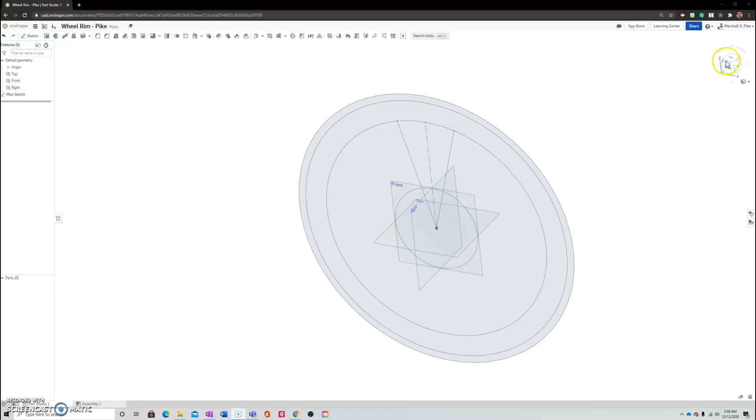For the first one, we're going to Shift E to extrude. We're going to select the third outer rim and the fourth outer rim, the two outermost circles. When we do that, we're given a bunch of options.

For this one, we're going to keep it as solid. This is a new one. You can see the two faces of the main sketches we've picked. Now here's the trick, because we're going to use this main sketch later on.

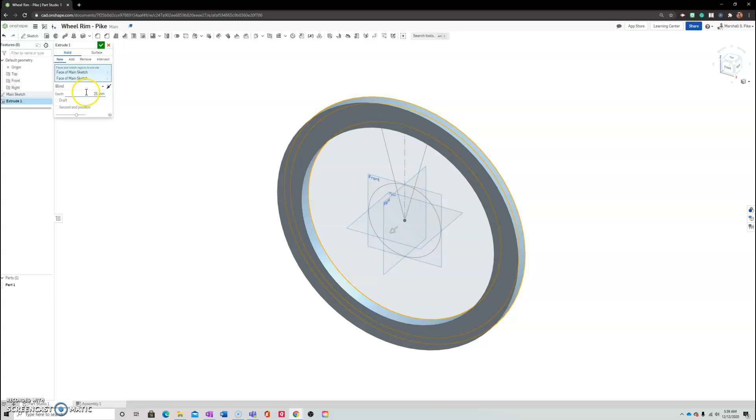Instead of using blind, which extrudes from our main sketch in one direction, we actually want this to go an equidistant in both directions. That is called a symmetrical extrusion. So I'll switch over to symmetric, and now you can see my main sketch has stayed in the center, extruding equidistant from it.

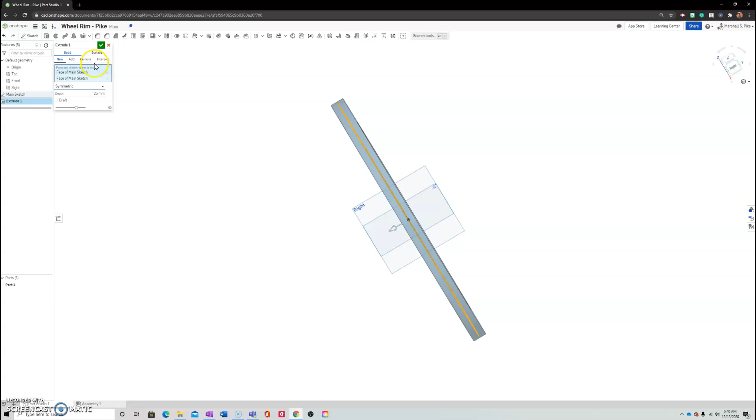The distance that I want is 150 millimeters. Once we do that, we'll go ahead and hit accept. Now that we've created this extrusion, we have our first part here in our feature tree.

From here, let's right click and rename this part, and we're going to rename it wheel rim.

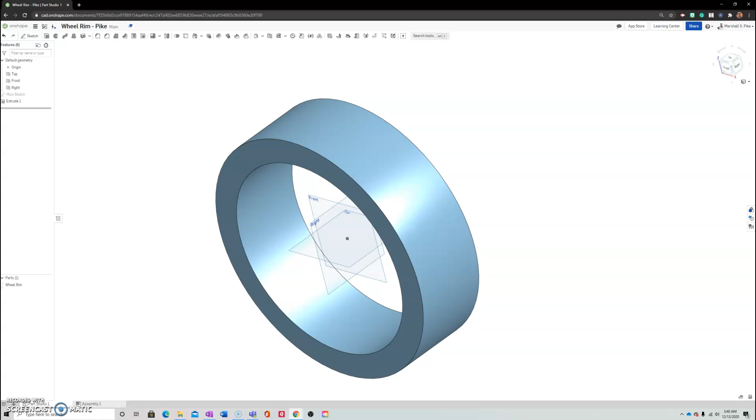Now, you can hit P on your keyboard to get rid of the planes if you'd like. Our main sketch is now gone because we've used it to create this extrusion, but it's still there, and if you hover over it in the feature tree, you can see it.

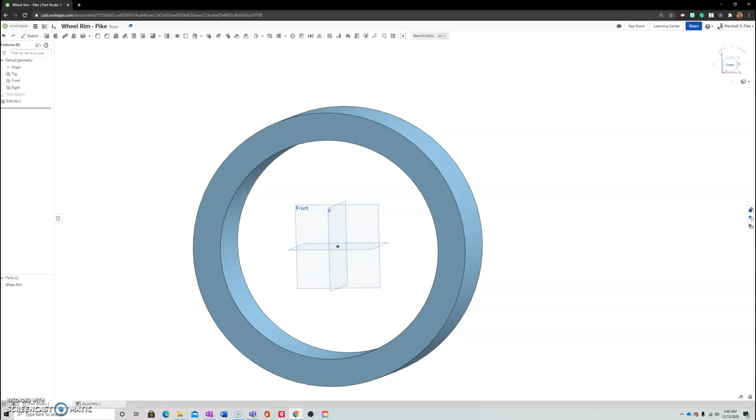We want to go ahead and add the second part of our wheel rim, which is the hub. To do that, hover over the main sketch, turn it on, and you'll see it appears again.

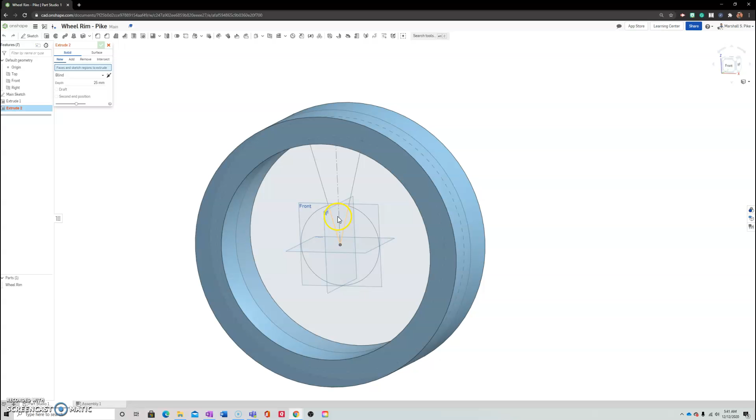From here, we're going to Shift E for extrude again, and this time we want to pick the interior circle. Now we have two different parts: this little pizza piece here, and then our circle. So you need to make sure you select both of them.

When you select both of them, this is going to be a solid, a new solid. We should have two faces that we're extruding, and we want this to be symmetrical as well. The distance for the hub will be 200 millimeters.

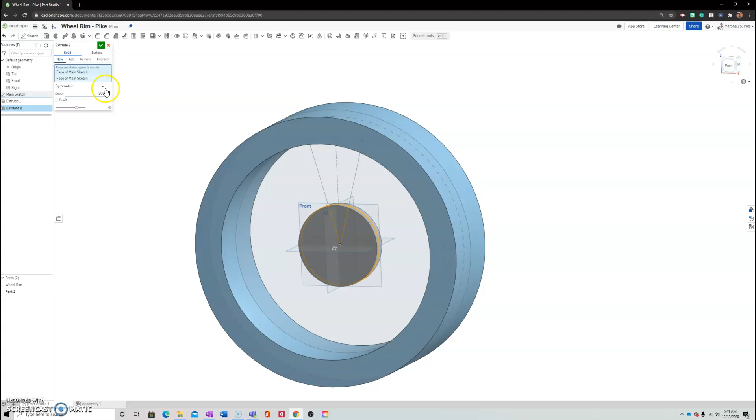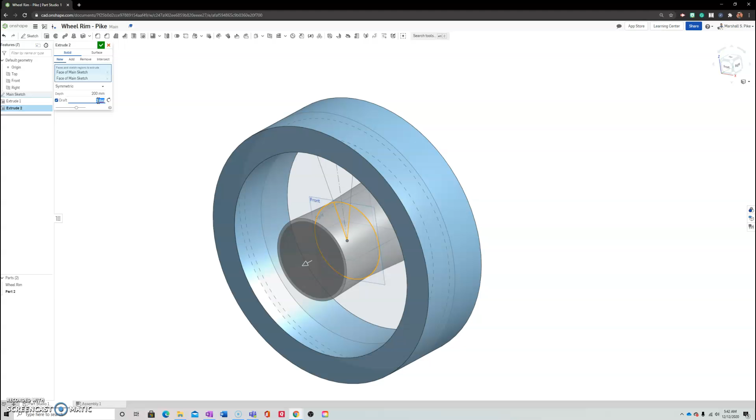We also want the hub to fit nicely in here, so we're going to do what's called a draft, which takes away a little bit of the solid. Down here is the draft, and it gives us an angle measurement. The angle we want to draft or slope it would be 5 degrees.

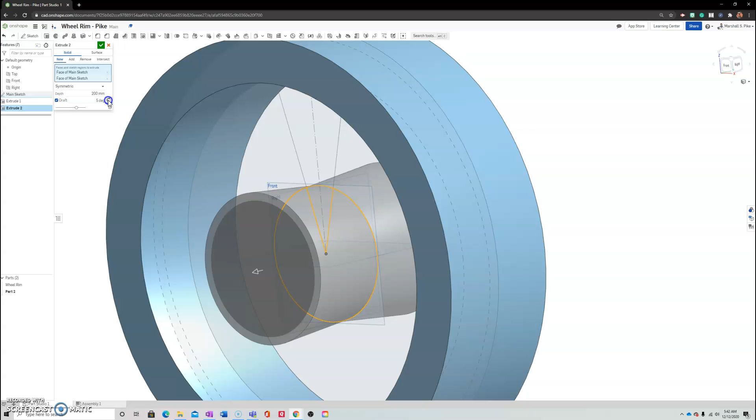As you look at it, it might be difficult to see that it actually drafts inward toward the center of my main sketch, which actually added material. If we were to put this on, it could be very difficult. So we want to use our rotation option here and just rotate it so that it slopes away.

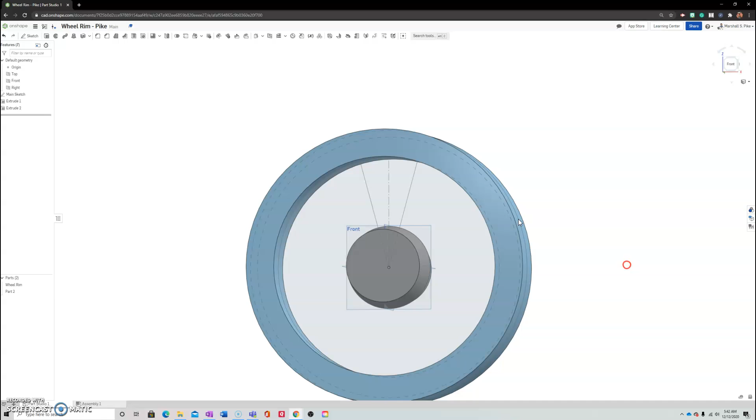Now you can see it's showing the material I've been removing from the hub. Once we have that hub part on, we'll go ahead and accept that. Now we have the outer rim and the inner rim of our wheel.

All right, that's going to be it for this video. Check back, and we're going to start adding the solid part in the middle for our spoke.